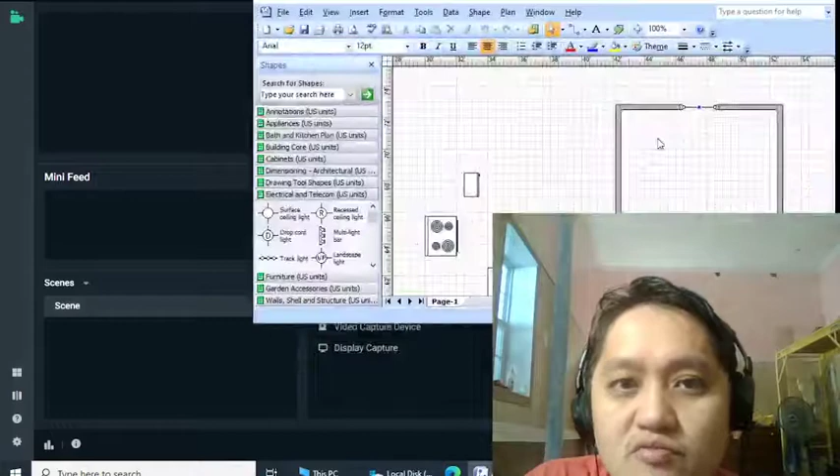This house is actually painted on the outside with a plaster, and so we're gonna go to our drawing. If you're wondering, this is Visio 2007, but you can use any software you want. You can even use Paint. You can draw it by hand.

We started out drawing it by hand first, but for the beams - let's see, here we go, I think it's under structure - you would have some kind of beam or something. There's some missing items here, not every item's in this list. You can add more somehow, I think you just right click on it - add to my shapes - but it's disabled. I'll have to figure out how to make that work.

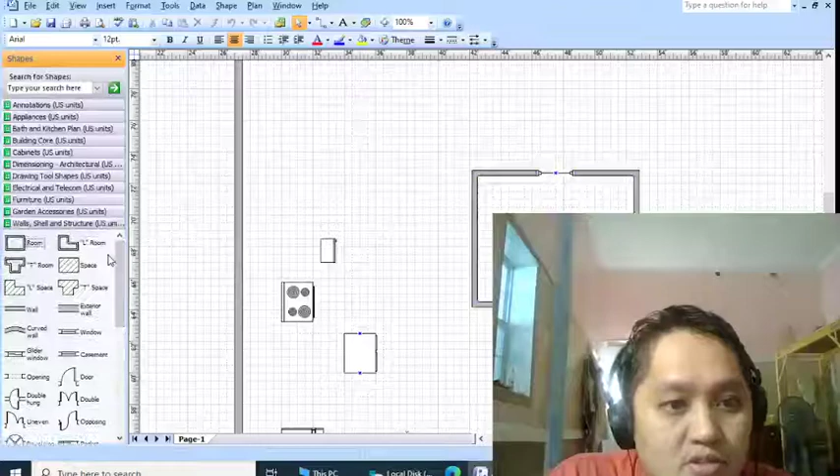In the meantime, you can temporarily just put it in any circle, because our beams are actually in the circle shape, and they can be any shape you want - hexagonal, square. That's standard because when you have blocks that are flat, they butt together like in a square shape, making it easier to finish the job. Otherwise, if you have a fancier or rounded shape, there's actually a bigger gap, which is still not too hard to do with cement.

You can just seal up the hole. But when you're doing this part - one plan I kind of forgot at the beginning but remembered later - is that you gotta plan out your openings in the wall. That's including your door, your window, and anything water related. Ideally every room would have some kind of water, at least to cool the room, and a little bathroom in every room.

And then electrical wiring, both AC and DC, is prudent to do. That's a smart thing to do because you're going to get to that eventually. And then heating, cooling, ventilation, and air conditioning, and then also openings for any other extra stuff like security, fancy stuff like LED lighting.

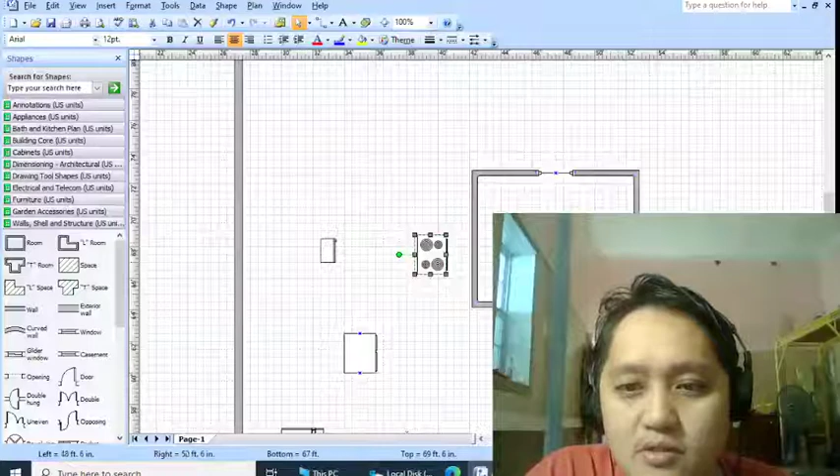So we're just drawing kind of like this, and you just put the oven to the side here. And then you can see the dimensions of the room now come up. On the first video you didn't see it because I didn't click on it yet, so it's kind of delayed. I was thinking I'd have to enter these manually, but whatever you stretch it out to, this is in US size right now - feet and inches. If you're not familiar with that, and they don't have yards yet, but there's probably an add-on you can make or download to get that.

So this corner box here just kind of expands proportionally the dimensions of the room, and this will actually stretch one side of the room. So that's kind of the difference between each of these boxes here.

As you learn the software, you'll remember this consciously at first, and later it'll become intuitive. A really big room could be huge, you could build like a 100-foot room if you have enough land, but that's gonna take a long time, literally decades. I've already worked on this house over the calendar year, it's been almost 8 years, but the real time we put in is less than 18 months, because we don't have our full crew here yet.

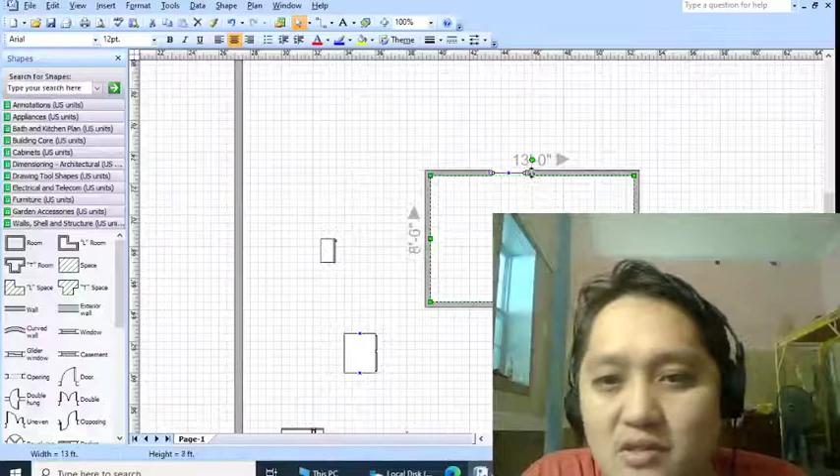When you're talking about permitting, the government gives you a standard estimate of how much time it should take, but you have to let them know if you're not done yet, because legally they cannot tax you until the house is finished and you actually live in it. You can only be taxed for what you use, a fair price, not overcharged for somebody else's gain, greed, or salary. I don't get paid for building this house, to be honest, yet. I hope someday to rent it out, but I haven't actually rented out even a single second or a day.

So I'm looking at the number here, it's 13 feet right now. I'm not sure, standards are usually like 10 by 10. I've seen 10 by 8. Let's go nice and roomy, let's go 15 - this room is probably at least 15 feet, so we'll just go straight 15. And then this way is like 15 feet too, so we can fit a lot of cool things in there.

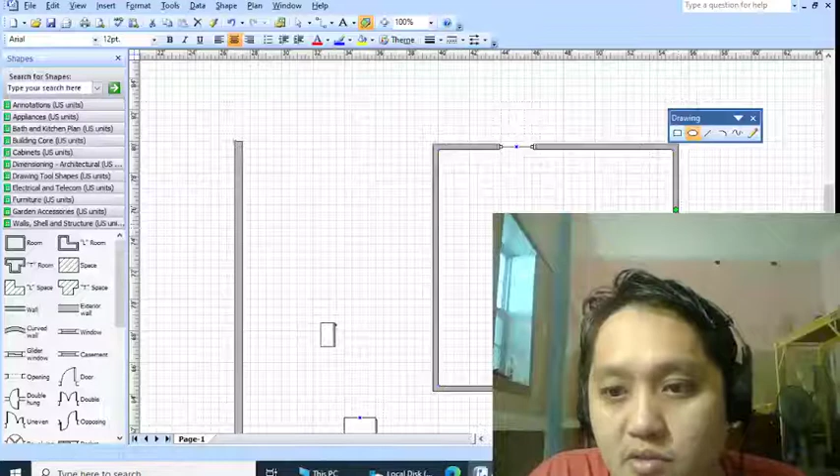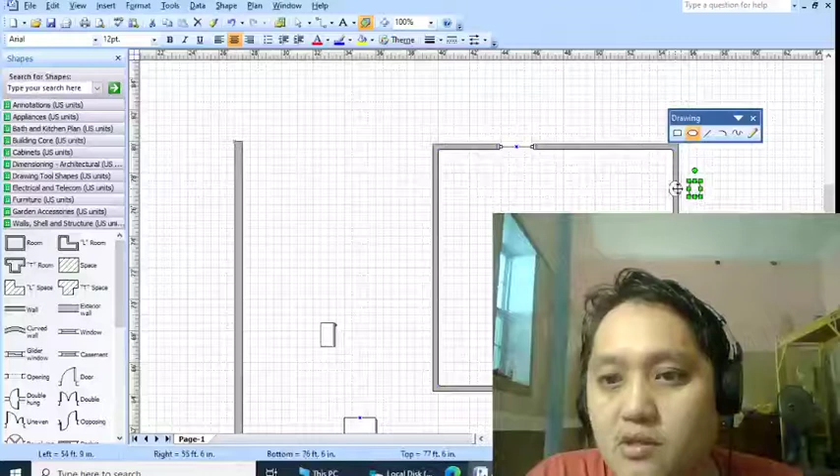Here the walls are all flat, but you can actually insert a shape. There used to be a thing here called shape or something like that - right here, drawing, just to make your own. This is how I drew originally the beams, like a circle - no, that's an oval, there we go, like a circle. So the beams are like that big, but these are actually 12 inches. If you just do a shape, you won't get the inches and stuff on it, but it gives you an idea where they are. You can exaggerate so you can kind of focus on that.

Now you build the frame. When we built the house, we actually built the frame first - let me go back to my screen here so I can see myself. We built the frame first, and before that we built the foundation, and before that we did the dirt work, and before that we actually built a shed that we temporarily slept in to have a place to live.

But you gotta live on the property if you want to save time, otherwise commuting is a little hard. You could live at a neighbor's house, but at that time our neighbor was down the street a ways, and we could have slept in the living room and rented out the living room to somebody. I'm thinking of doing that - it sounds kind of weird at first, but you could make like $5,000 a month from renting every space in your house, even at night if they were quiet, or you could just put paper in your ears or an earmuff on.

I don't know why I still have my headphones on - this is so I can hear. I was watching some videos.

One was actually the Dying Light 2 reaction video by somebody from Gameology, like Omar or something, I forgot his name - he has a very unique name, one I've never seen before. And some other woman who's like a stuntman, sometimes it's kind of interesting, but I think those jobs are really dangerous. People have lost an arm, I've seen it - somebody missing an arm and leg, and somebody like Bruce Lee's son died during a stunt, that's what I heard, and I'm like, it's so dangerous, why do we like to watch that? Now I don't like to watch it anymore at all, I try to run away from it, avoid it. But you find out that you can edit the game, and I'd love to redo the Dying Light game. I like to see it before, like when it was normal in the city, and just enjoy that. I'd be happy - wasn't that the whole point of games in the beginning?

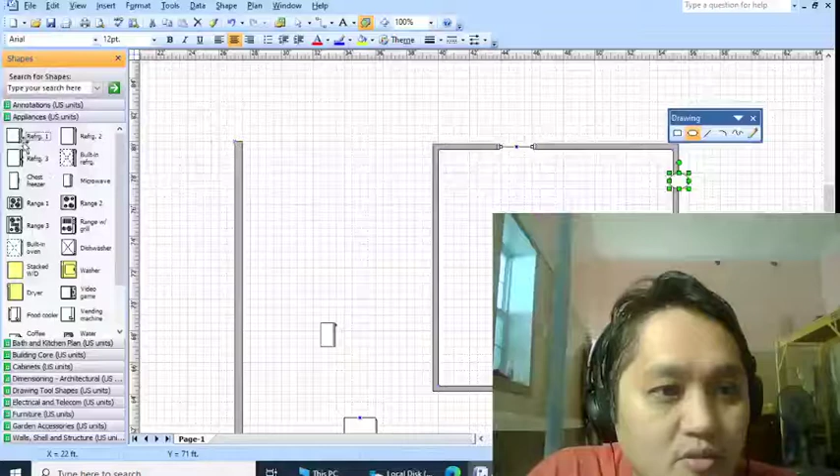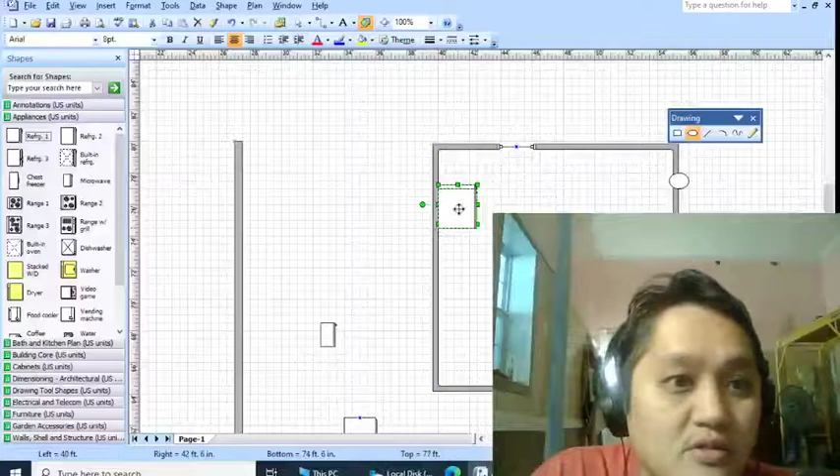The range, the refrigerator's a must. We actually have just one refrigerator, that's what we started with. But does it show you the dimensions? I don't know, we're trying to. Oh, at the bottom it does. It shows the kind of coordinates. I don't know what sizes, they all look the same - they're slightly different sizes, one bigger than the other. So I'm just going with the smallest refrigerator, and it said fridge one. I think that's what most people have.

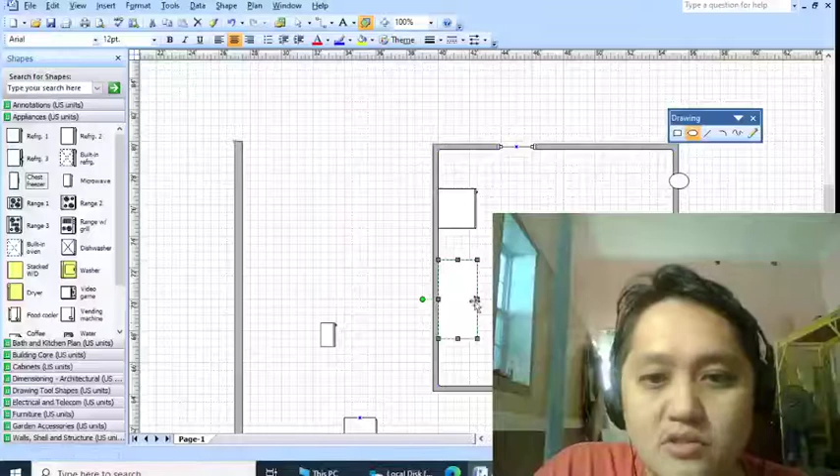And then we actually have a chest freezer in the shed, so I'm going to see what it looks like. We have that, that's a big chest freezer - my god, that looks like it's twice as big as the refrigerator. And then this is actually a microwave. This here is a microwave.

You could build, if you want it really simple - I've thought about this - you could build a house with just 4 walls and not have any extra walls, then just put up basic framing. It would save you some money, save you some extra doors and windows and whatever else you're going to put inside of it, and then add it later if you wanted to. Just put a curtain, like at the hospital, they kind of do that to section out the room. But structurally, I think it's a little bit weaker. So if you got to go to the most minimum budget, that can be done. You could go with the thinnest walls too.

Like the space shuttle or the space station, just thin metallic walls. But there's a problem with that - the heat actually transfers through, so it gets really hot, or cold. That's the reason why most people would do at least a 6-inch thick wall, like an inch on the outside, 4 inches on the inside, and an inch on the outside, maybe a little more. So maybe it's like 7 to 8 inches.

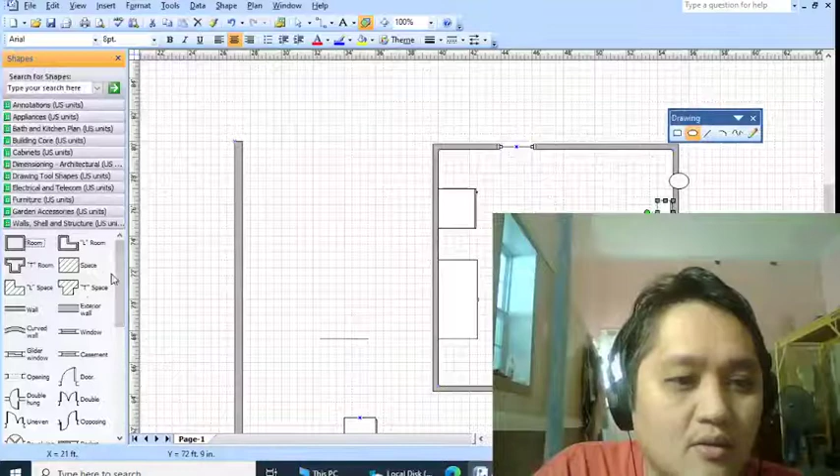It doesn't have everything enabled, so you get the torrent version like I do. Just do what you can. Even if you buy the full version, I'm sure stuff's missing from it. You're not always going to get the full set of everything. So you get as close as you can, and then you can redraw this by hand if you need to. You can leave this printed out and actually draw on top of it, so you can combine what you need to do.

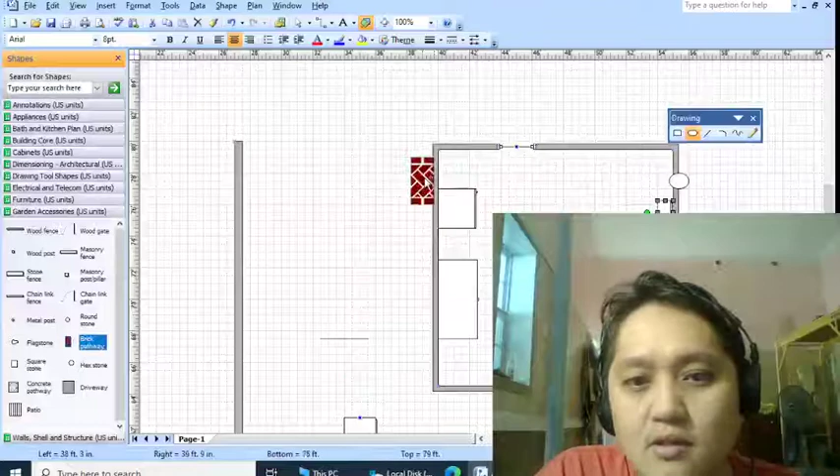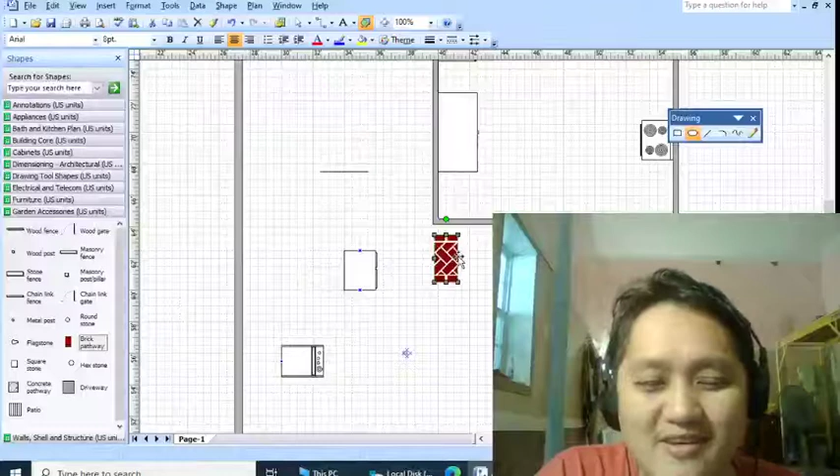Garden accessories. Oh, brick pathway. I've actually built one of those back in the day. That would be kind of nice. Let's see what that looks like. Okay, it does work. That's kind of nice. It's already kind of this slanted, angled brick, which I don't really like much. I like the straight one. Partly because the slanted kind of makes me feel dizzy, and then it looks kind of ugly, to be honest.

There's a wood gate, there's a concrete pathway. That's kind of nice, let's put that back here. Oh, that's kind of nice. That's funny, just little triangles. Yeah, that's what concrete looks like. That's what we all think about it.

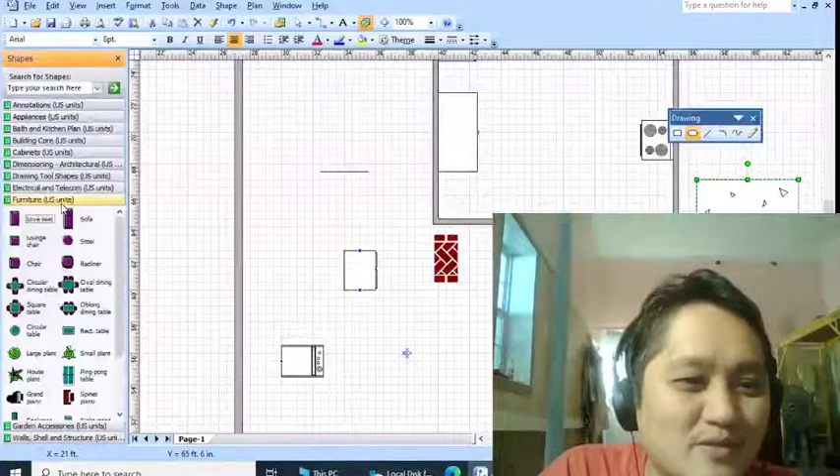Oh, here's your love seat. There's a small plant, that's kind of cool. Let's put some plants in there. I don't know what kind of plant that is. Wow, that looks different than the icon, right? Yeah, you wonder why that is in software. The icon is actually one piece of software, and then the item you pull out can be another piece that's hidden inside of the computer. So what you're seeing is a visual representation of what's inside, and that can change.

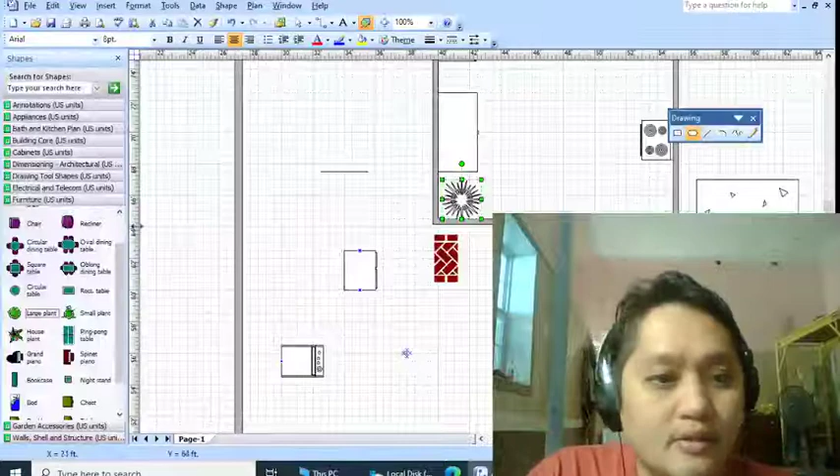All right, so let's work on this a little more. Here's a bed, that's kind of cool. So if you build your house all one room first, that's the cheapest thing to do. You can start with a really small house, like 400 square feet. Technically you would need only like 100 square feet for one person to live. So if you're single, you could start with that and then add on later. That makes the project really easy. Make the shortest ceiling you can, which is actually like 7 feet. You can make 6 feet too, but it's so tiny.

You'll find that there's problems, like if you jump you're gonna hit your head. If somebody's taller than that, they would hit their head, like Shaq going in a 6-foot house. But the extra space helps because your house might sink someday, and also you have flooding issues, so if you're higher up it's better. So I recommend you find out what is the highest it's ever flooded and build higher up than that.

Because no matter how thick you make your foundation, the ground tends to change, get softer. If a miracle happens, part of your foundation starts to go missing. I think that's what happened to that house in Florida, that 12-story apartment building. It stood for years, so something odd happened. I think it's because of the sand, too. If you look at the photos, there's sand all around, and there's a lot of areas of Florida like that. So if you build in areas with a lot of sand, the water can sink in, and the chemicals react, and it can erode your foundation.

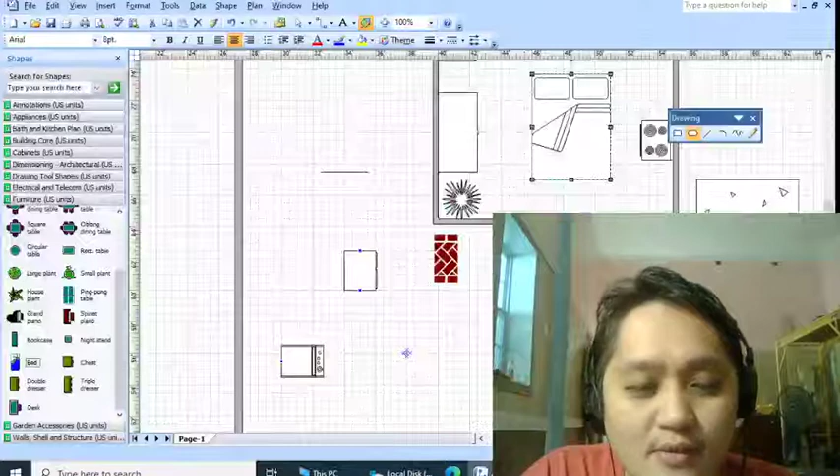Sorry, I do that with my eyes. I don't have my glasses on, even though I have one pair here.

I can get a spinet piano. I didn't know what that is. Oh, is that like an acoustic piano?

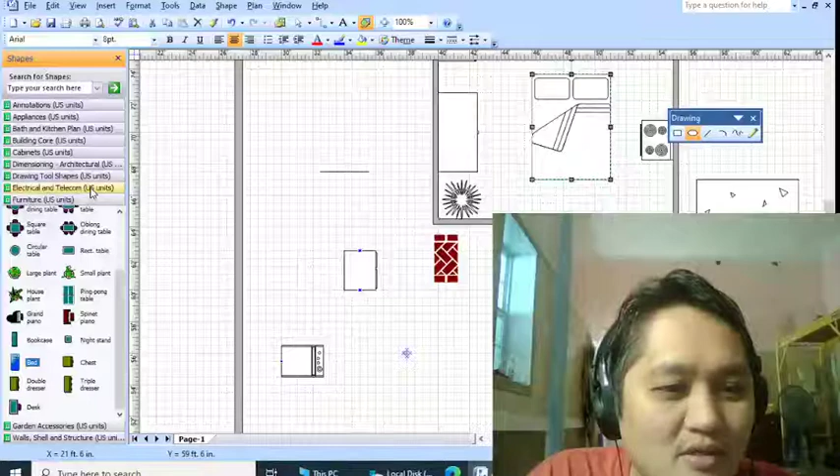Or a grand piano? I'm kind of scared to put that in there because whatever you get, eventually you get everything here, but whatever you get in here will become real. Your mind's gonna start doing it.

It kind of goes into your memory, like a 240 volt outlet. If you're not familiar with electricity and different voltages, there's basically 2 types when it comes to AC, and they have different outlet shapes. There's actually multiple 200, 240s when you learn more about that. There's ones that are a little wider, the prongs. The prongs are actually circular. The ones in America, the prongs are usually flat, and then there's a circular one at the bottom.

So they all need to be grounded, and you got to check your electricity just in case. But some days it's not grounded. Strangely, the ground can disappear or shrink or something. It's something odd that happens, and then it reappears.

So you might have to put in one ground for every outlet or more, and then you're gonna be okay. And maybe have an emergency kind of exterior ground so that you can see it. If you put it on the outside, people can actually see it, so that's better, so they know for sure it's grounded. Otherwise, you hide everything in the wall.

I don't like doing that because you have to drill out the wall and plan a hole and build around it. It adds up to be a lot of extra work for nothing when you can put everything on the outside and still be just as safe. And it's easier to work with later on, I think, and it doesn't ruin the wall in case you have to replace it in the future.

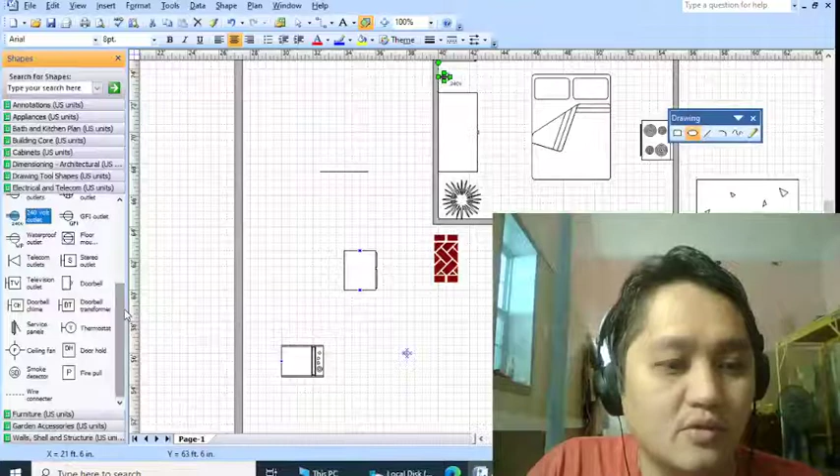Like the old saying, give credit where credit is due. So smoke detector, a fire pole, my God, there's like a lot of things you can build. This list could go forever. Horizontal measure, and these are just drawing tool shapes. So there's actually some shapes built in already. That's kind of nice. This is the first time I ever got a chance to look at all this, so this is new to me.

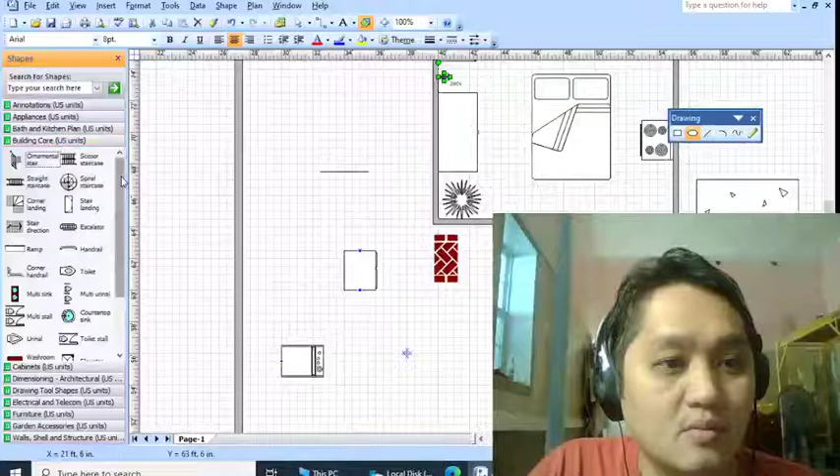Dimensioning architectural, so there's different arcs. Cabinets are kind of fun. Wall cabinets versus kitchen cabinets, I guess. And then you got building core, so this is like a spiral staircase. Now I like the staircase idea. Just the scissor staircase sounds kind of cool.

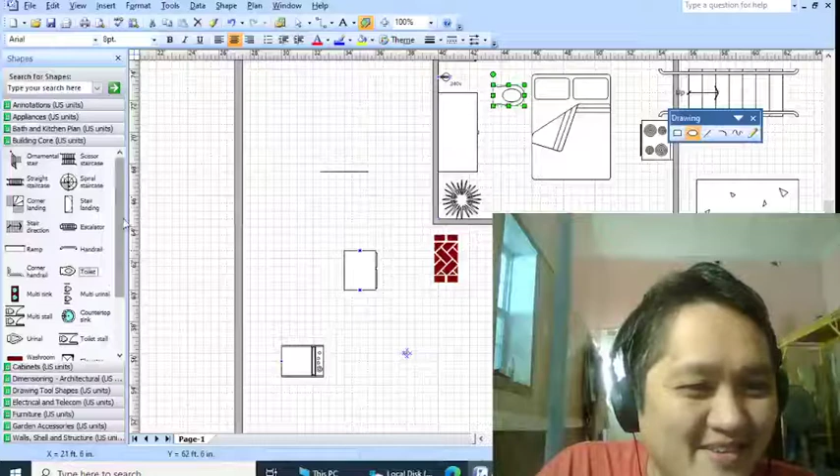Let's just put a regular staircase first. Oh, that's nice, it's drawn out pretty cool like that. So because I want to add one to this house in the back later on. And then your bathroom here, we're just going to throw a toilet in the room. I don't think I have the strength to do this. Surprisingly, it does take a lot of energy to lay this all out.

So there you go, there's more items. What do we got in the bath and kitchen? Oh, bathtub, man, I haven't seen one of those in years. Countertop, sink, medicine cabinet, oh shower is good.

Actually, you find out you don't need to have a bathtub right away. No, it costs a fortune. Like literally, if you had everything on that list, it'd be like millions of dollars to build, and the rest of your life. So you don't want to do all that at once, and you can't. You gotta at least sleep and eat and exercise and go on vacations. So try to be conservative, just go with what you need. Be happy with that, enjoy it. And once you get it built like this, then you go on from there.

So I hope that helps. In Visio, there's a lot of options here. You got a whole row here.

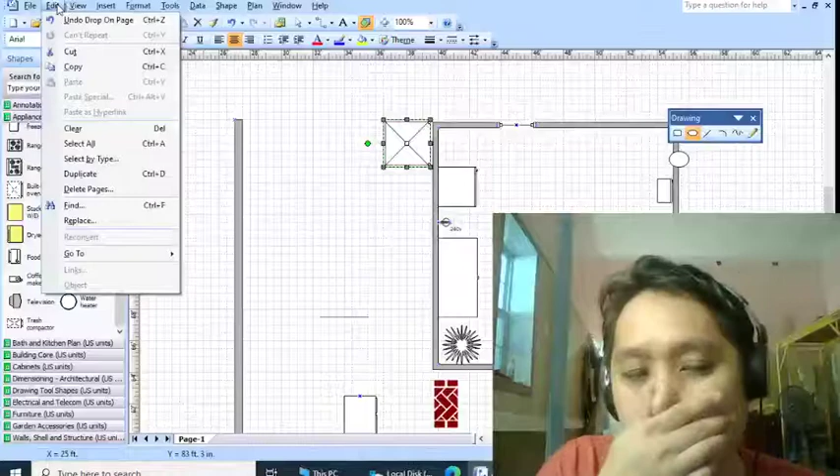Probably like 100 things you can do here. You can actually say this is a web page, that goes into another program I forgot the name of, but you can create web pages with the Office suite. Then edit view, you can change the view here, add different toolbars like an action toolbar. Those help with different tools to draw out more things, put in shadows, fill in color. Really anything you want, you can create.

But you go with what you need first, then add here and there what you want. You'll feel happier. Or you can go all out if you won the lottery and you're a multi-millionaire, go for it. But I think I would get sick of working here so long. I've been here almost 6 months this time, but usually only 3 months.

And really we're working - like I'm resting sometimes, we're working a few hours a day. It saps all your energy to work hard and so heavy. A lot of stuff we had to carry by hand, which is good exercise but it burns you out a bit. I think I aged a bit carrying so much concrete.

I wish I had a forklift and a nice road path, because you want to build the roads coming in and out first before you pull in trucks and stuff. Otherwise they'll get stuck, especially on a wooded area or a place with a lot of rocks or just mud. So you have to put a lot of rock, concrete, and some metal helps - rebar, it helps hold it together so it doesn't crack. Otherwise everything will crack and break.

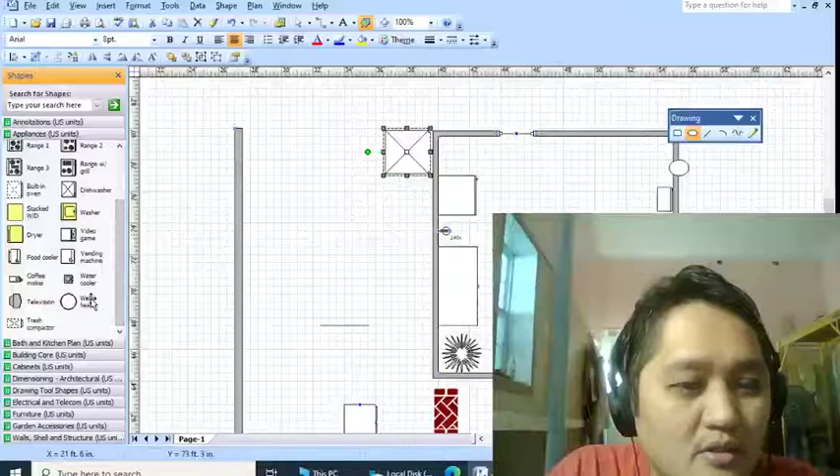Going back to this, there's a water cooler, a water heater, a trash compactor, and a food cooler. What's the difference between a food cooler and a refrigerator?

Oh, I know what it is. It's like when you go to a cafeteria, you'll see it like a glass box, and it doesn't have a freezer and a cooling unit like a refrigerator usually does. But some refrigerators are fancier, they have more stuff, ice boxes, and some even have a special code to open, an alarm and everything.

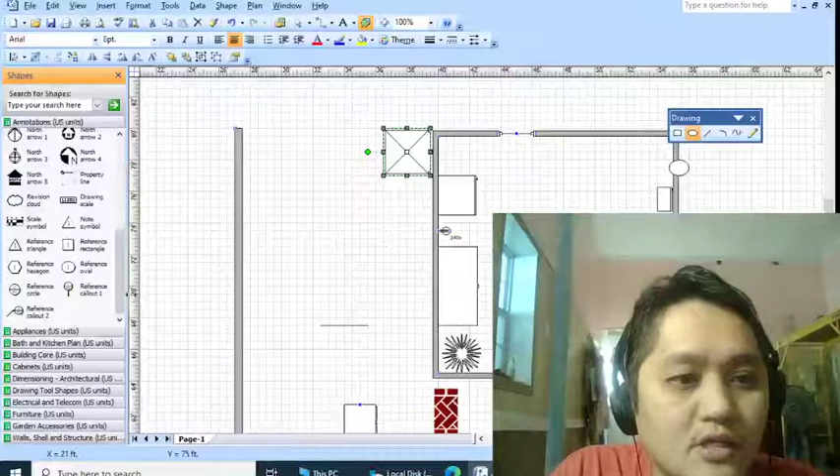Okay, I think that's most of the stuff here. Over here is convert to walls. What does that do?

Oh, it converts something to walls. Okay, it didn't work with that. There's shapes here, I'm going to do kind of a tour on what this is. The spell check I've used - it just says spelling, but it's actually a spell check here, a replacement.

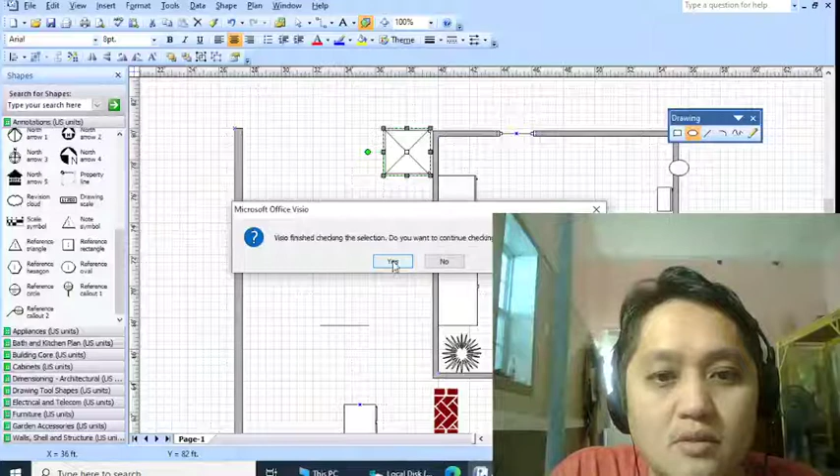You can say yes, this is complete. I don't think I've put any words yet, so there's pretty much very little to check. Research is kind of interesting, but it doesn't do much unless you have the whole pack. Oh, you can actually research like the in-house help book or files. So charts, equations, that's kind of cool.

CAD drawings - oh, there's like a Microsoft CAD. Oh, you can add a CAD drawing into this drawing. Oh okay, that's new, I never knew that. So there's a lot of stuff here, you can check it out. We'll go through it maybe later on in another video when I give a full tour of Visio.

But this is just the construction drawing. So if you're more comfortable drawing it out by hand and then making a digital copy, that's good to do too. When you draw by hand, you'll have the most freedom to draw anything you want. On the computer, it's cool to draw, but it's, you know, this is a mechanical...

Visual representation of what you want to see. Like this bed here is already pre-done. I'm actually able to draw a line on top of it. I was trying to grab it, so you can actually move it around.

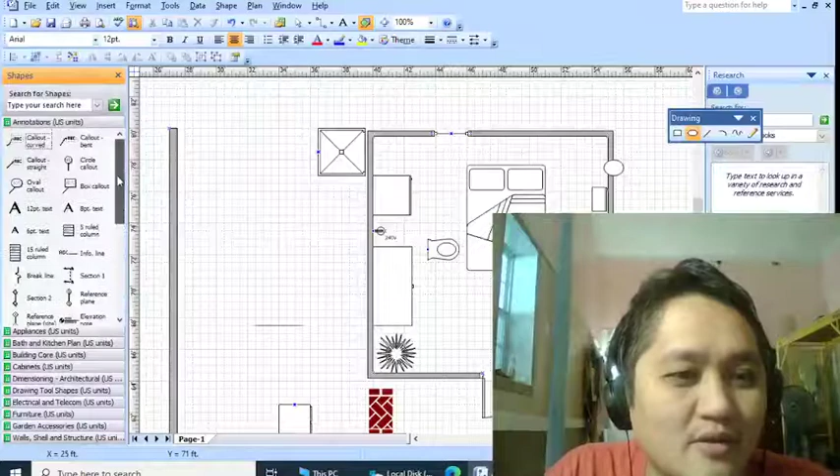Yes, you can draw anything you want, I did say that, but that takes some time, and you could actually put people in here and stuff if you wanted to see what it looks like. It's kind of weird, you could use it to make a little movie later on, like the Visio movie, or whatever you want.

So that's kind of the next step of the drawing here, more items in the drawing. We're going to continue to work on this one in another video. Right now, I'm going to take a little break.